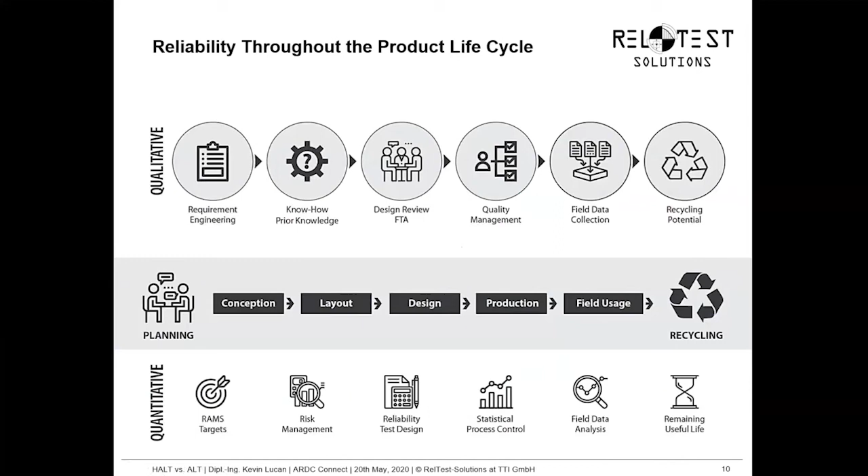Let's have a look at the motivation for this webinar. When we are talking with customers, most of our customers know different kinds of reliability tests, like you can see them here on the left side. Degradation tests, burn-in tests, but also the highly accelerated life test as well as the accelerated life test. And when we are doing reliability tests, it's quite important what kind of purpose the test should have. Do we want to improve the reliability? Do we want to measure the reliability? Or is it a totally different purpose of the test? And with this webinar, I will try to answer, especially for HALT and ALT, what these tests can be used for.

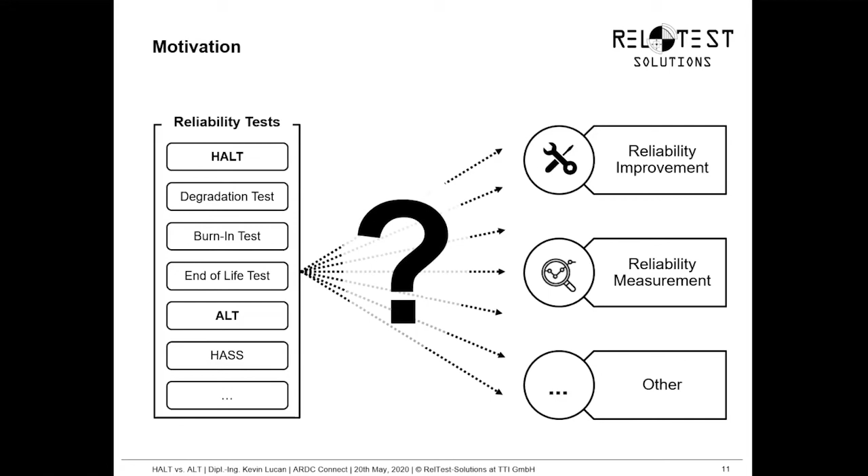But let's start with an overview about reliability tests in general. When it comes to product testing and product development, we are doing a lot of different tests, as you can see the types on the right side of the top. We are doing functional testing, environmental testing, verification testing, and in the end, hopefully we are also doing something like reliability testing.

And reliability testing is some kind of special, because reliability testing contains aspects of the verification, because in reliability you want to measure probability. It also contains part of the functional and the environmental aspects. So it is quite important that we consider these aspects too, and we have a look at them over time.

General purposes of reliability testing are, of course, we want to measure and demonstrate the reliability of our products. Therefore, in most cases, we have to determine a Weibull distribution and effects on the reliability. A second important purpose, especially in the early product development phase, is the improvement of the reliability. Here it's important that we gain knowledge about our product to learn what are the critical failure modes, what are their root causes, and are they relevant for the future.

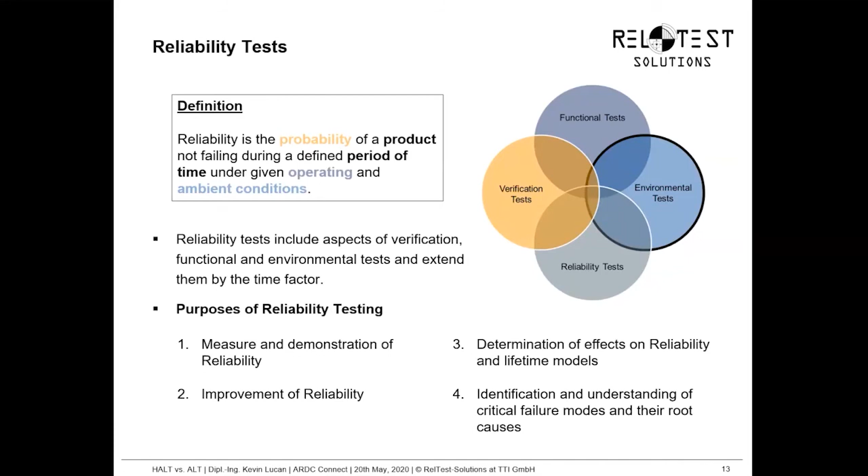But let's have a look at quantitative reliability. Their purpose is quite clear. We want to measure the reliability, and the failure root cause here is the robustness and the design. It's not necessarily a lack of robustness, but we want to measure the lifetime, the robustness and the design. We want to do this based on representative field loads because we want a good prediction for our reliability in the field later on.

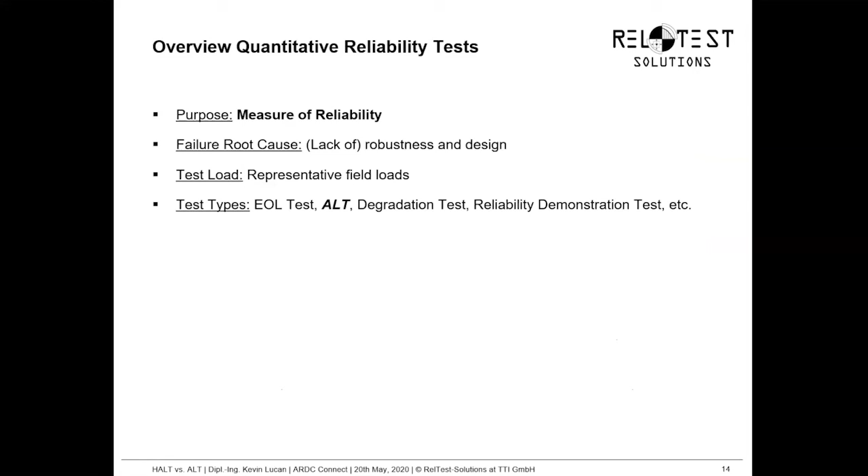Typical test types here are the end-of-life test, the accelerated life test, the reliability demonstration test, and the degradation test, which I show you quickly here. In a degradation test, we measure our degradation characteristic over time, then we estimate our degradation model. We make a prognosis of when the end-of-life criterion is reached, and then we can make a classical Weibull analysis to measure the reliability of our product and, for example, to demonstrate the reliability requirement. So demonstrating a reliability requirement is a classical purpose of a quantitative reliability test.

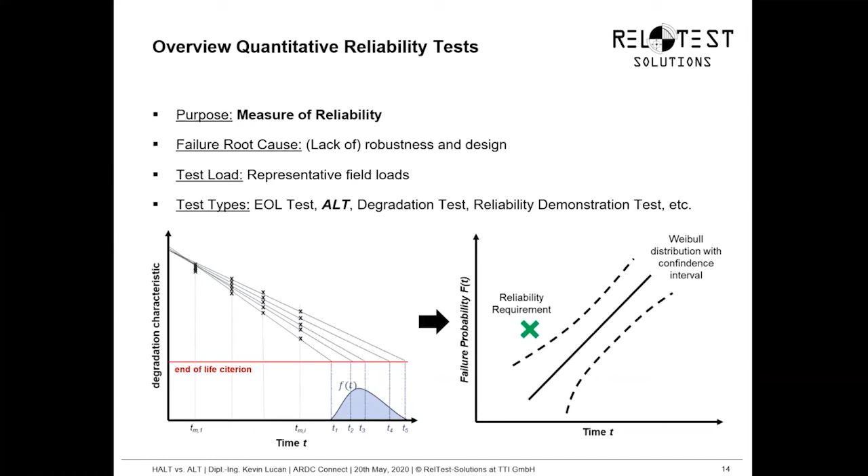On the other hand, qualitative reliability tests clearly have the purpose to improve the reliability. Therefore, their root cause is more design weakness and production error. Here, any kind of load which is suitable to identify this design weakness or production error is reasonable to test. Typical test types here start with the highly accelerated life test, the highly accelerated stress screening, the highly accelerated stress audit, environmental stress screening, and so on. But the purpose here is to improve the reliability.

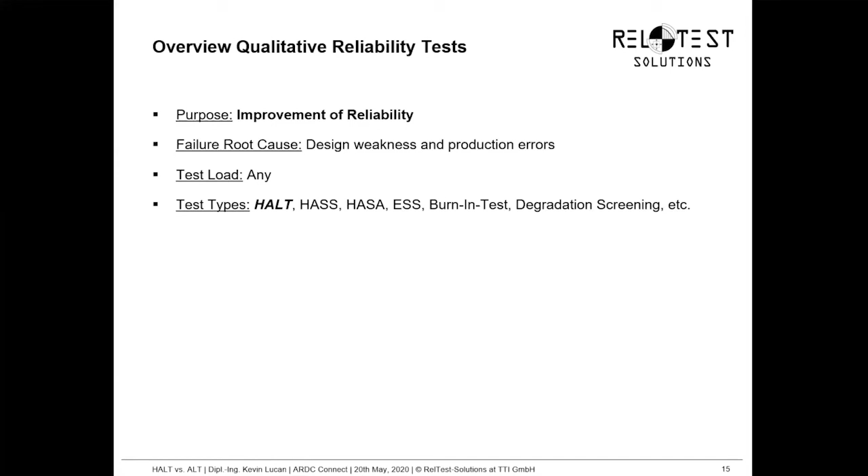Let's look at this in an example of the bathtub curve. Let's assume we have this kind of product. We haven't measured it, but if we had measured our failure rate, this would be the result. When we are now doing highly accelerated life tests, we are identifying our design weakness. If we are doing HASS, ESS, or burn-in tests, we are reducing production errors. So this helps us shift the bathtub curve down, to reduce especially the early failures and improve the reliability. Therefore, the main focus of qualitative tests is the early failures. We want to improve the reliability and fix these kinds of failures.

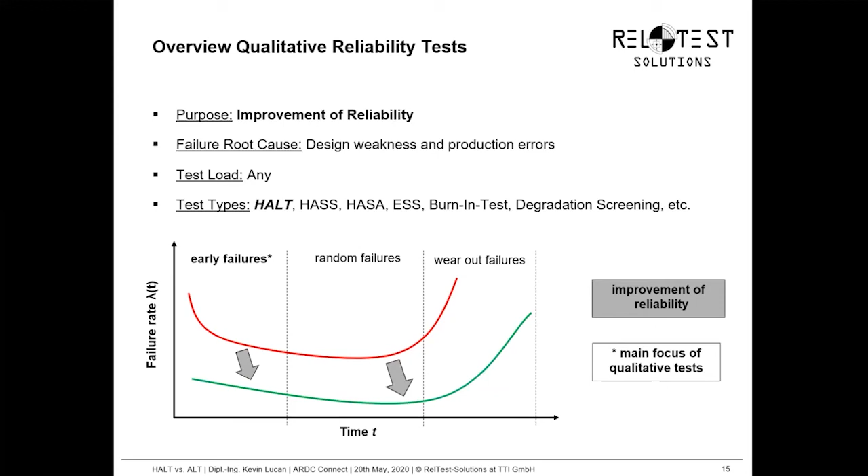This brings me to the first topic, the highly accelerated life test. We first get the deep dive in. The purpose of the highly accelerated life test, as mentioned before, is quite clear. We want to improve the reliability, and in detail, we want to identify our failure modes and design weaknesses. There's a very big benefit of highly accelerated life tests because they only need a short test duration and a small sample size.

But on the other hand, we have to go so high with our stress that we reach the destruction limit. And this can be critical, because going that high with our stress level, we have to think about whether the failure we see in a highly accelerated life test is relevant for field load conditions or not. So a failure analysis is necessary.

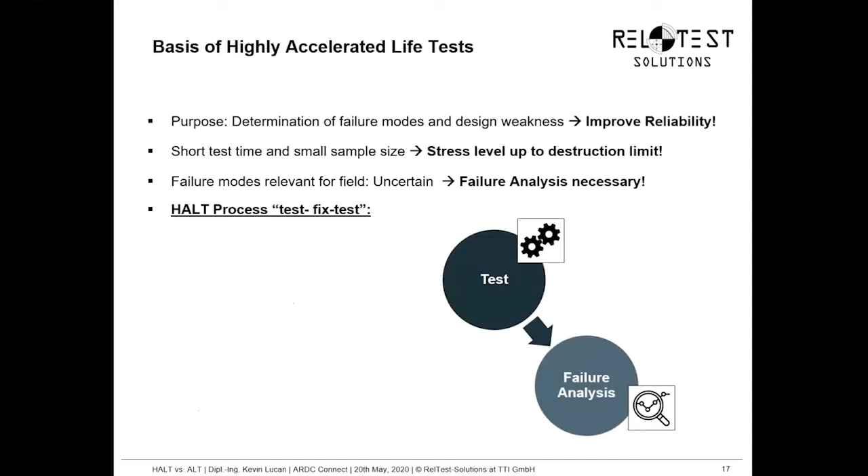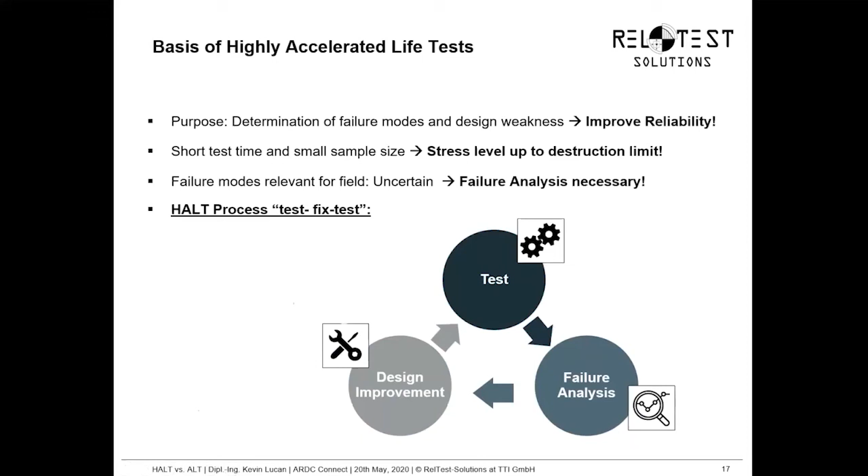Therefore, the highly accelerated life test can be described more as a process called test-analyze-fix. Starting with the test itself, we see some failures, and we have to analyze if the failures are relevant for the field load condition. After that, we can improve the design if it's relevant, and then we have to validate our design improvement. We repeat this process until we no longer see any relevant field failures in our product.

What is necessary to plan such a highly accelerated life test? Most beneficial and necessary is product knowledge. For planning such a test, you need the product designers on board. They can help you in the area of stress definition. So what kind of stress types do we use? What kind of stress severity do we use?

After that, we will have our process with the test execution, the failure analysis, then we are making a decision: is the improvement necessary or not? And if yes, then we improve the design and loop back to the test execution.

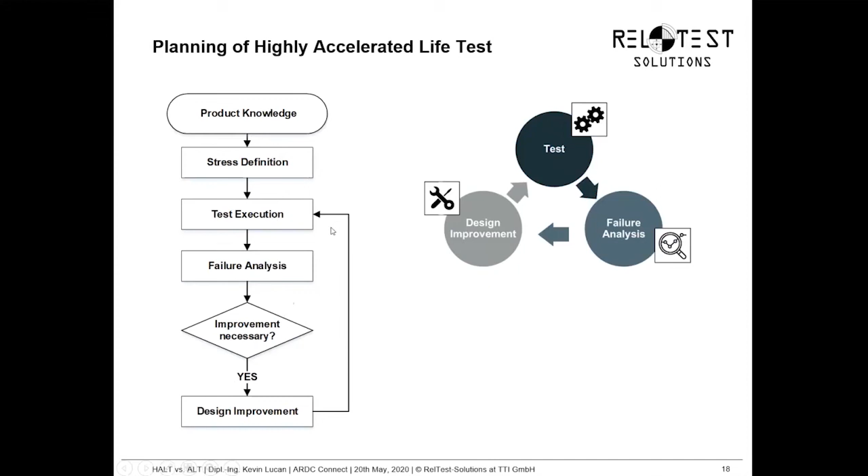Key factors for planning such a highly accelerated life test are, of course, the stress type definition, the stress severity definition, and failure analysis and design improvement, because we don't want to fix the wrong failure modes, because this will lead to oversizing in our work.

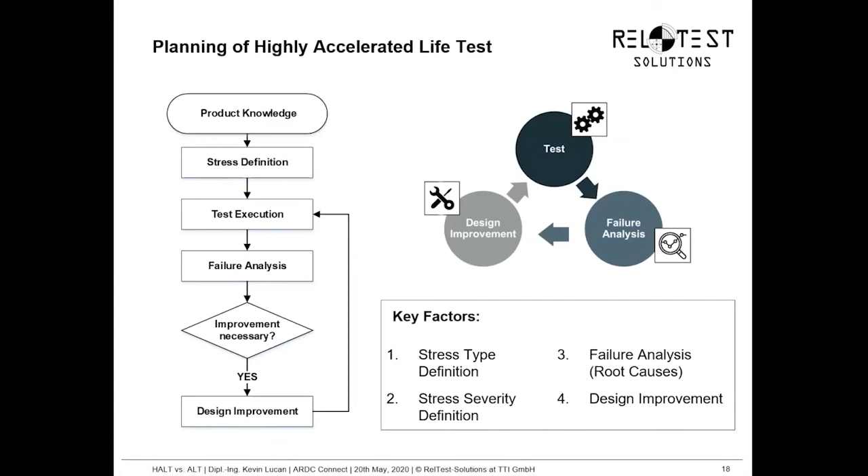Let's have a look at the stress type definition. Typically, stresses applied in highly accelerated life tests are mentioned in the IEC 62506. It's typically temperature, vibration, shock, and so on. But of course, as I mentioned before, a highly accelerated life test is not limited to these stresses. Here it's only important that the stresses we are applying in our tests are triggering the relevant failure modes, or the early failure modes, or in general the failure modes.

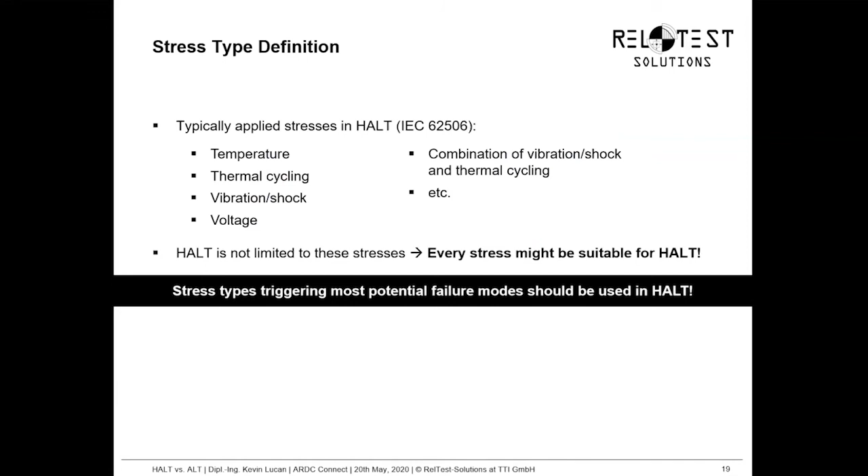Here the best strategy is to make an FTA or an FMEA to identify the stress types which are triggering most of the potential failure modes. And this would be the best base to start a highly accelerated test.

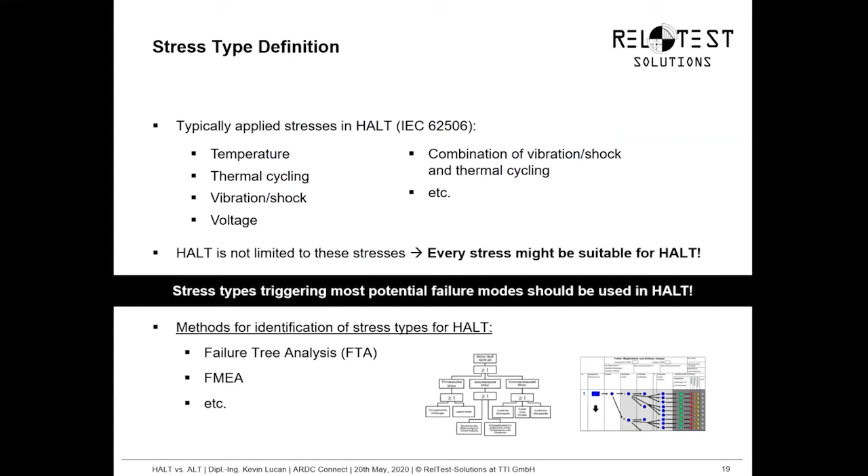Let's talk about the stress severity definition. I've told you before, the stress goes up to the destruction limit in a highly accelerated life test, and we're doing this by stepwise increase. But here it is quite important that we also define a maximum stress level. And I will show you in the example of the Wöhler curve why this is so important.

Let's assume your product designer used a material for which this Wöhler curve is representative, and you now have to plan a highly accelerated life test, and you start with a very high stress level, for example here in the area of low cycle fatigue, and of course you will see quite soon a failure within this area. You can say, oh, quite good, the test was finished quite fast.

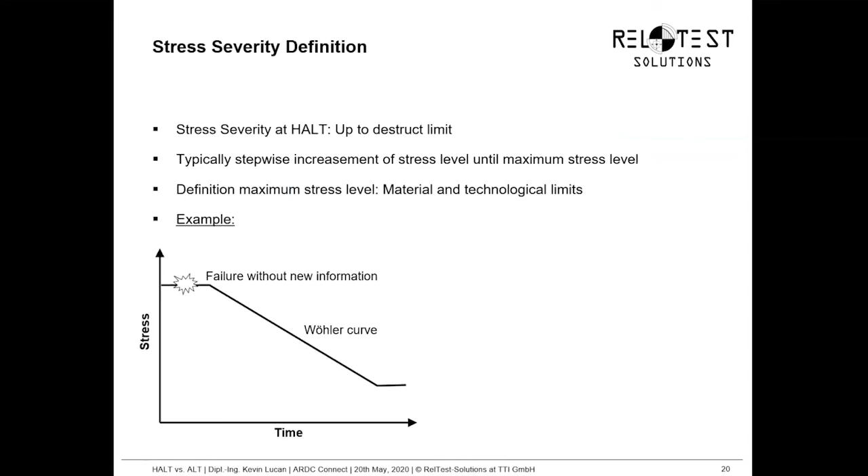But on the other hand, imagine, what have you learned from this test? You haven't learned a lot, because you just validated the Wöhler curve the product designers used to design the product. And therefore, it's beneficial to set the maximum stress level under this stress level and then plan our step stress up to this maximum stress level, because only then will we gain new information about our product.

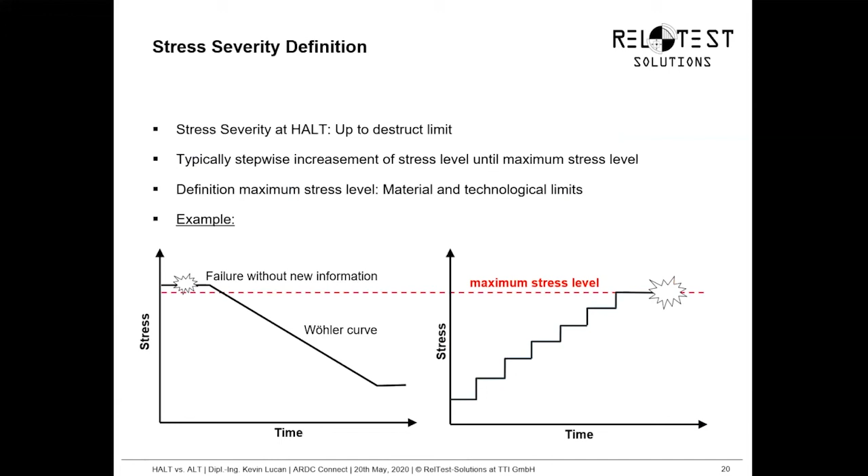Also very important for the highly accelerated life test is the failure analysis and the design improvement, because fixing failure modes may also lead to oversizing in our product. So we have to make sure that the failure modes we are going to fix are also relevant for our field load condition. And therefore we have to make an evaluation of the failure mode, starting with the root cause analysis.

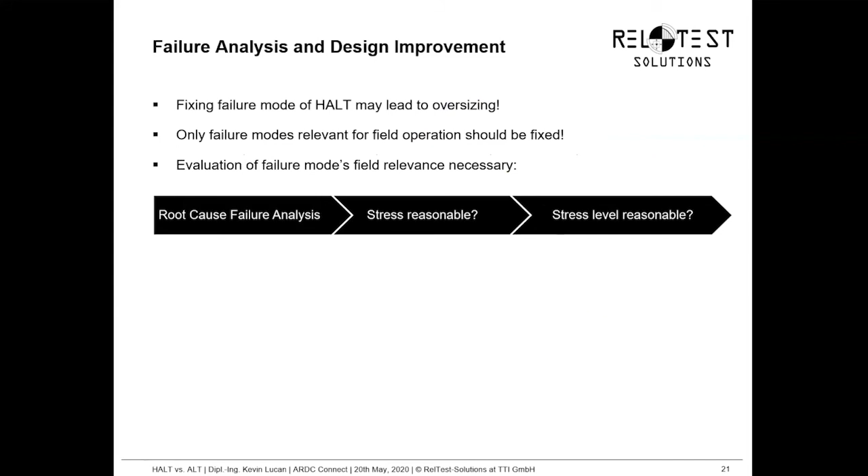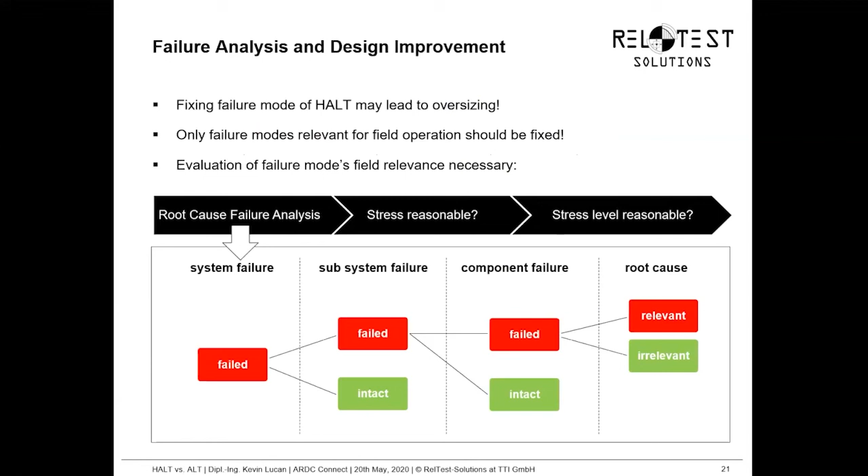In the root cause failure analysis, we have to identify where the failure is happening: in our system, our subsystem, on the component level, what is the root cause for the failure, and which stresses may cause this failure mechanism. After that, we can compare the stresses causing the root cause with the stresses our products see in the field, for example mechanical influences, mechanically active substances, contamination, and so on. Is the stress type relevant for the field condition?

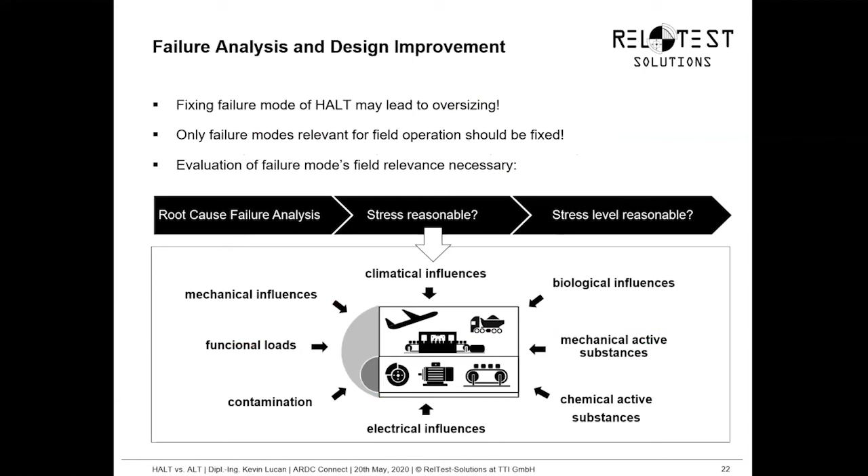Then we should think in the next step: is the stress level reasonable? And here we have to consider the operating margin of our product. Within this margin, between the lower operating limit and the upper operating limit, our product is operating. And if we see failures within these margins, then it's reasonable to fix them.

When we now go more to the right or more to the left, we will reach our upper and lower destruction limit, which is in this example quite reasonable. Here I would say this is quite okay, because we have a good distance between our operating margin and the destruction limit.

But imagine if we have failures at the upper destruction limit and we are going to fix these failures, improving our design and shifting the distribution of the upper destruction limit more to the right, then we are well on the way to over-designing the product. And this has to be prevented.

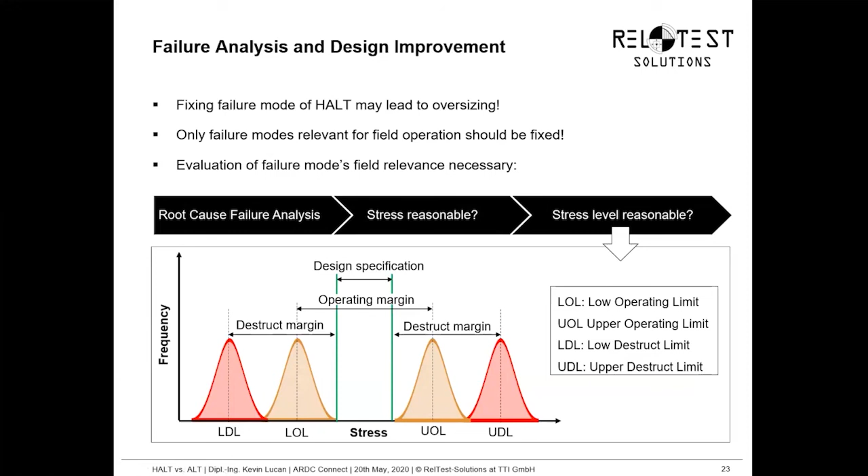This brings me to an example about the highly accelerated life test of a DC-DC converter for airplanes, which is listed in the IEC 62506. Here, three kinds of highly accelerated life tests were performed, starting with a low temperature test, where they recognized that the startup is quite unstable.

They identified possible root causes, but in the end, they came to the decision that it is not necessary to make a design improvement, because we are here already at the limit of our technology, and we rather have to ensure that the DC-DC converter is operated within the limit of technology.

In the next highly accelerated life test at high temperature, the 12-volt voltage disappeared. The reason for this was that there was an internal temperature limit which causes the shutdown. And this is a typical kind of failure when you're getting a potentially failed part back from the field, which is running in your test.

So here we have a typical kind of a random failure, because if the limit is too low, then the software will shut down the DC-DC converter. The customer will think, okay, it's failed, and therefore the company here took the action to adjust the limit which was defined in the software.

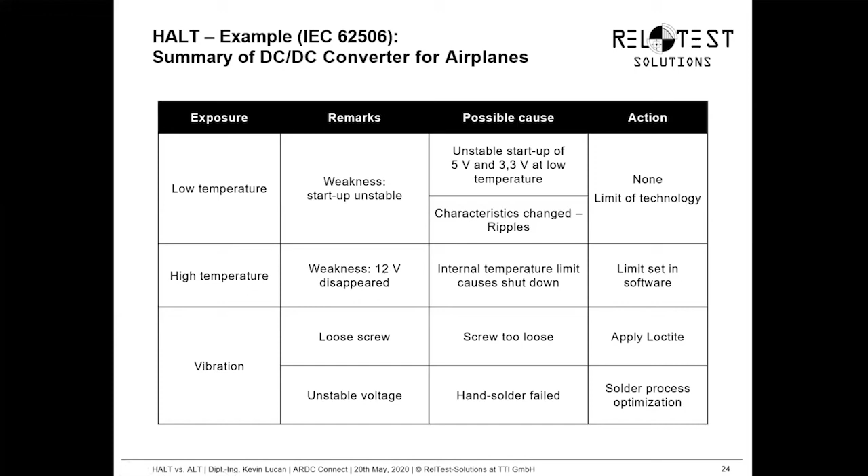This brings us now to the topic of accelerated life tests. And because highly accelerated life tests are used to improve the reliability, it's quite clear we now have a test which is here to measure the reliability.

In detail, with an accelerated life test, we can determine and describe the relationship between the stress and the lifetime of our product. And with this knowledge, we can then make a prognosis for the reliability of our product under field load conditions, which is quite beneficial because an accelerated life test is finished much, much faster than an end-of-life test on representative field stress conditions.

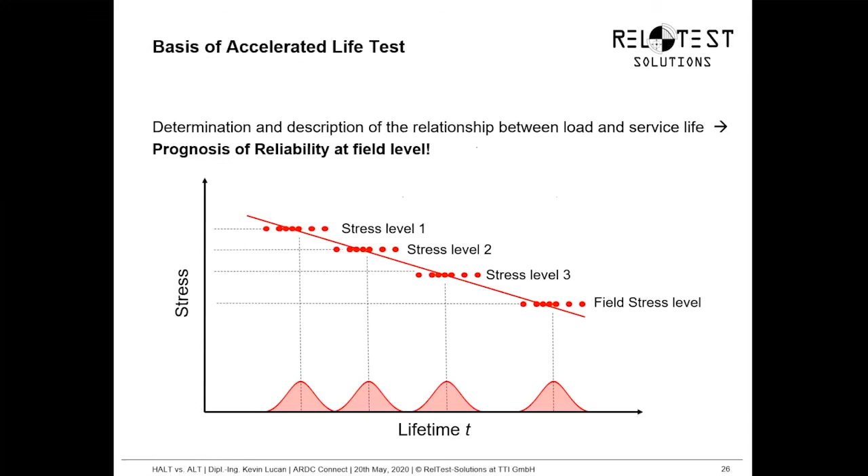The typical process of planning an ALT starts, of course, with the reliability requirement we have to demonstrate. And with this requirement, we go into our planning. We have to define our test levels. We have to define the sample size per test level. And after that, we have to execute the test.

And then a very important step is necessary. We have to make sure that on all test levels we see the same failure mechanism, especially as it will occur in the field. This is very important because we want to make a prognosis for the field condition. Therefore, we have to make sure we see the same failure mechanism. If we have the same failure mechanism, we can then make a prognosis for the field reliability.

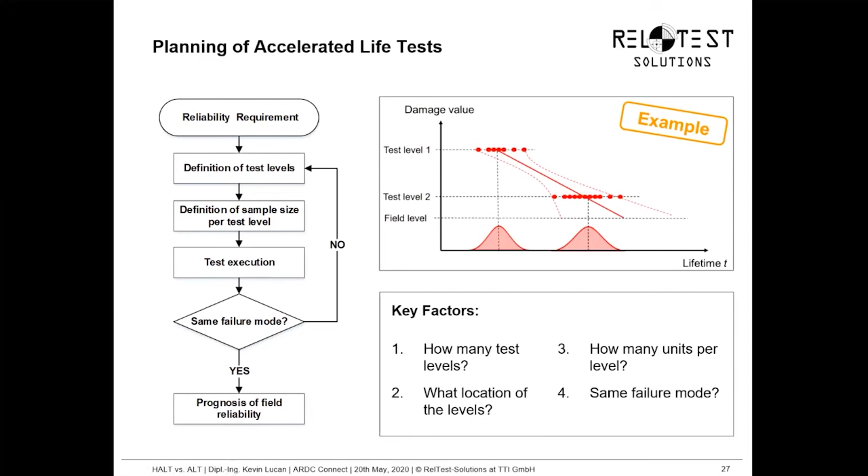Key factors here for planning are the number of test levels which are necessary, the location of the test levels, so the stress severity, how many units per test level, and as I mentioned before, we have to make sure that we see the same failure mechanism on all test levels. Let's start with the key factor, how many test levels are necessary.

And of course, the answer here depends on the lifetime model which suits best for your product to describe the relationship between stress and lifetime. If we have a linear relationship, then test levels x1 and x2 would be sufficient for an accelerated life test. If we are not sure if we have nonlinearity within the lifetime model, then we should add a third test level to check this.

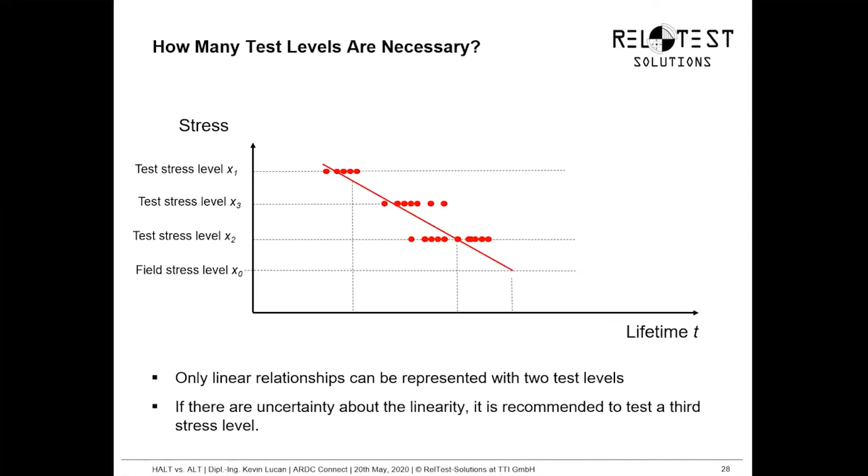So in the end, if you are not sure if you have a nonlinearity in the lifetime model of your product, then make it safe and test the third level too.

Let's come to the specification of the stress level, starting with the highest stress level, which we call here stress level 1. For the stress level 1, it's quite obvious that we have the biggest benefit of an accelerated life test if the test duration is as short as possible, and therefore we want to define the stress level as high as possible. But we should not go above the technical maximum of the acceleration limit.

And in this case, this means the limit where we no longer see the failure mode which is relevant for the field. So if we have a changing failure mechanism by going up with the stress too high, then we should go back down a little bit so that we see the same failure mechanism as in the field. Here, of course, the results of a highly accelerated life test we may have performed in advance of this test may help us in planning the highest test stress level.

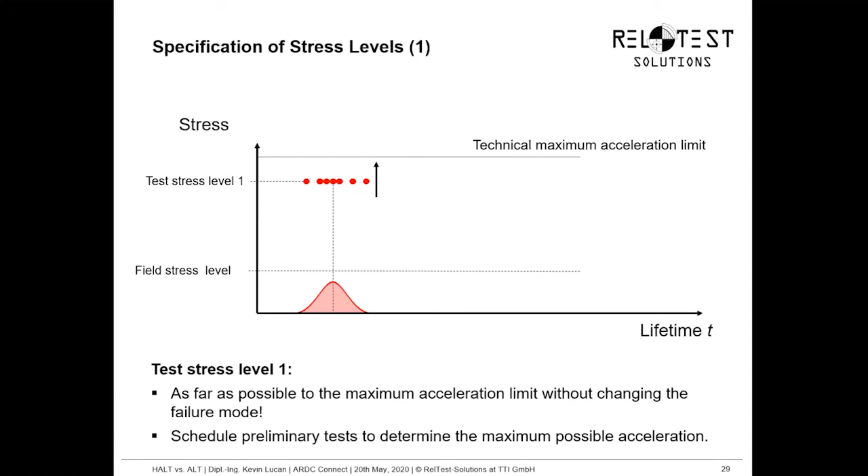Let's have a look at the lowest test stress level, the stress level which is quite near to the field stress. Here, of course, it's quite beneficial on one hand to have this quite near to our field stress level, because then we have a high prediction quality, but on the other hand, we also have a very high test duration. So two goals which we have to deal with in our compromise.

On the other hand, if we define the stress level too high, we will have a very huge scattering in our field level prognosis. And in the end, here you have to find a compromise between the precision of your reliability prognosis for the field and your test duration. And typically, the boundary conditions in your test levels are always giving you the opportunities you have for planning the accelerated life test level 2.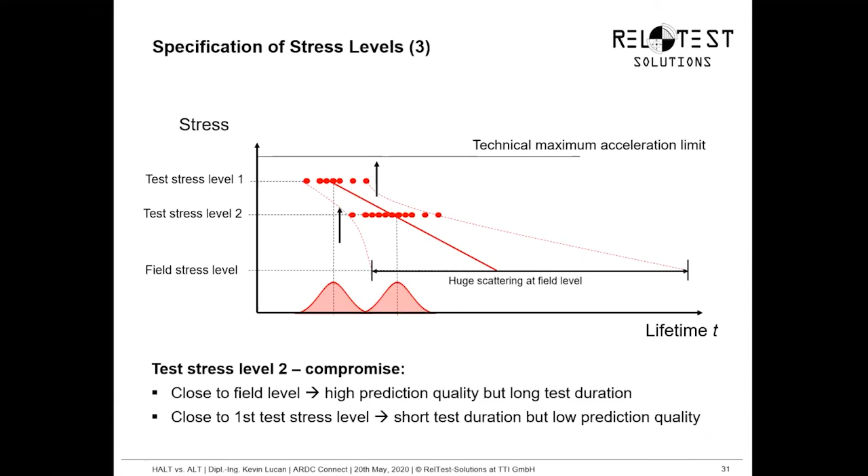The third key factor for planning an accelerated life test was the sample size per test stress level. And here it's always the case that at the highest level you have to test fewer units than on the lower level. The reason here is if we test more on the lower level, of course, we are raising our prediction quality for the field level condition.

There's also a formula where you can calculate the proportion of the parts which have to be tested at test level 2 based on the extrapolation factor, for which the input of the test stress level 1, 2, and the field stress level is necessary. And based on this relationship, the proportion of the parts which have to be tested in test level 2 can be calculated. It's a formula from the master of accelerated life testing, Nelson.

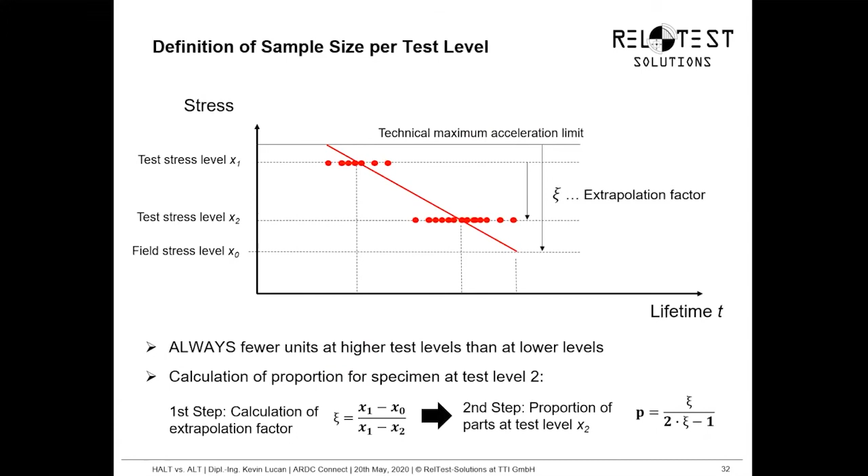This brings me to the example of the accelerated life test. Here, as announced in the beginning, the example for the commercial vehicle brakes and for the air brake. If you are interested in this example, you can download the technical recommendation of the working group from our homepage. But now let's have a look together at the example.

For this example, it is assumed that 1 million load cycles with the load level of 6 bar correspond to a service life of 2 million kilometers. So 2 million kilometers is a typical lifetime objective for the commercial vehicle industry when it comes to long distance missions. Boundary conditions for the accelerated life test are: we have already defined the test level 1 with 16 bar. The reason here is this was the maximum of the air pressure cylinder.

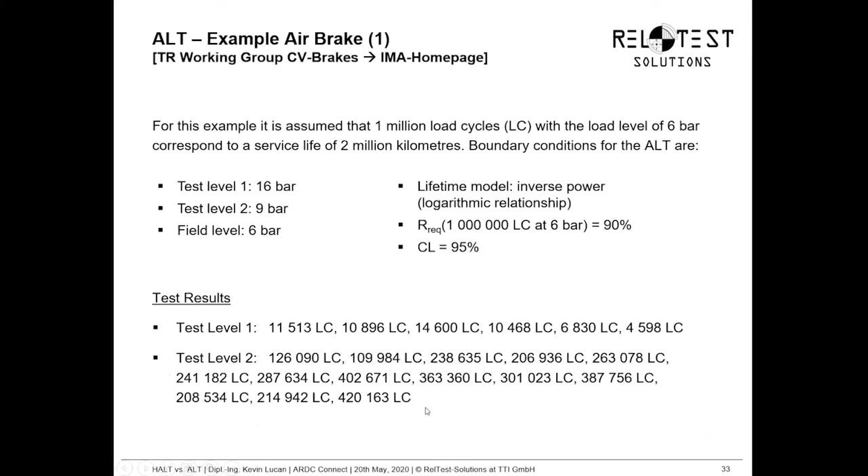Then test level 2 was defined at 9 bar, and the field level, as I've said before, 6 bar. We have to prove a reliability requirement of 90% at 6 bar with a confidence level of 95%. Here you can see the listed test results. And the first step now is we have to check if we see the same failure mechanism on both tests.

And what we can use for this check, of course, is to compare the Weibull shape parameters. And in this case, they are quite similar. It's not always the case that these are so similar, because in a lot of cases, we see lower scattering at the higher load condition, and then we will see a higher shape parameter, for example, at 16 bar or whatever the highest load condition is.

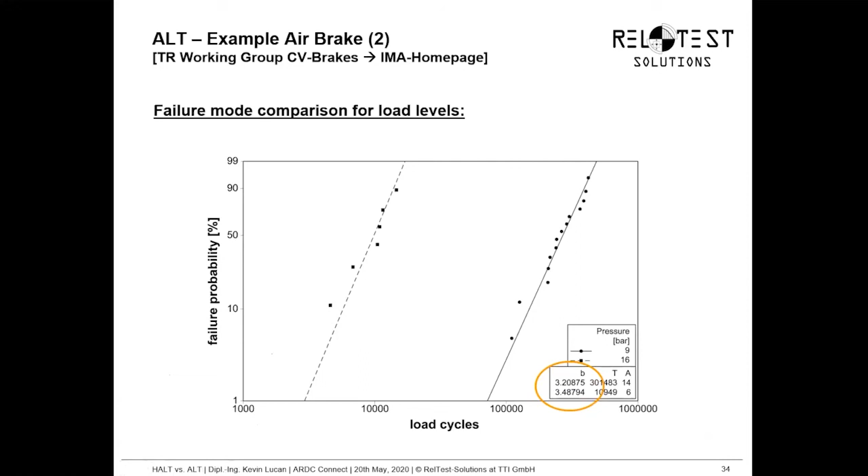But in this case, we are quite satisfied. We see the same failure mechanism. In this case, it was fatigue failure of the caliper of the brake. Then we are making our prognosis for the field reliability. We estimate a model for the 10% percentile because we have the reliability requirement of 90%. We estimate our confidence intervals.

Then we have to look at our field level condition, and luckily we see here that the requirement lies on the left side of our 95% confidence limit. So luckily we succeeded in demonstrating the requirement in this example.

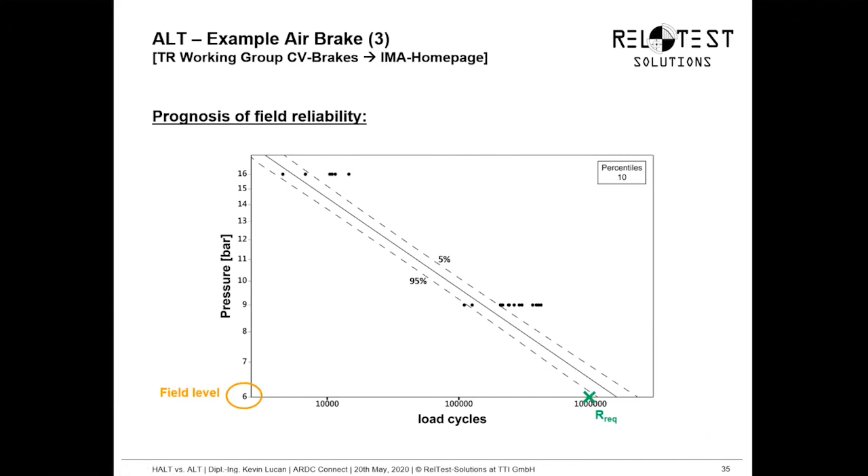This was a deeper look into highly accelerated life test and accelerated life test. Let's compare these tests more directly. The table you can see here on this slide is of Mr. Yang. You can find this table in his book Life Cycle Reliability Engineering, which is a very good summary for the comparison of highly accelerated life test and accelerated life test. And therefore I will only discuss 3 issues of this table with you.

First issue, it's quite clear we have different purposes between highly accelerated life test and accelerated life test. Highly accelerated life test improves reliability, and in an accelerated life test we measure the reliability.

Let's have a look at the severity of the stress. In highly accelerated life test, as we discussed before, we go up to the destruction limit. And on the other hand, in accelerated life test, we have to make sure that we do not change the failure mechanism if we go too high in our test condition. So Mr. Yang prefers here to stay below the operation limit, but of course you can also go higher than the operation limit, but then you have to make sure that you still see the same failure mechanism as in field load condition. This might be very beneficial, especially for products which have to last 30 years or something like this.

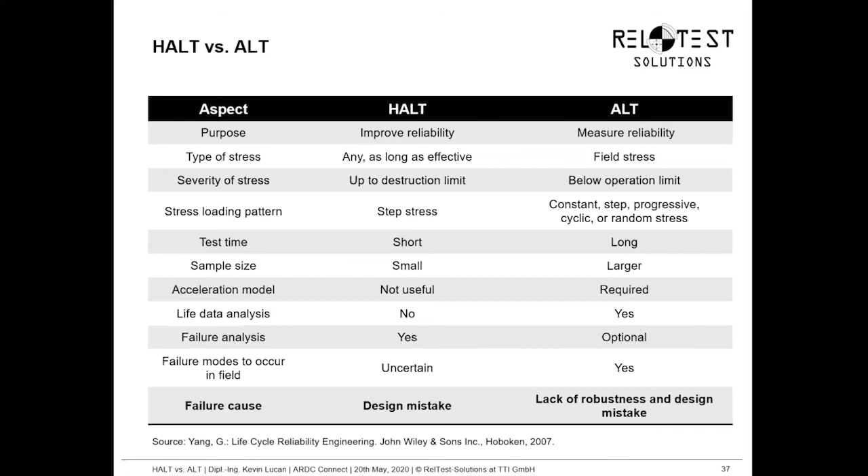Last aspect I want to discuss with you is the failure cause. Highly accelerated life tests address the design mistakes, the early failures. And accelerated life tests, on the other hand, are addressing lack of robustness and design. But what does this mean? When do we have to apply them in terms of our product development process?

And as you can see here, a rough reliability management process starting parallel to the planning phase and the product development, ending at the recycling phase of the product. The reliability management starts typically with the reliability planning, the weakness analysis and the reliability improvement, the reliability testing and the demonstration, the reliability assurance in production, and in the end, we also want to learn something about the reliability in the field, about the load conditions of our product in the field.

And of course, HALT are used to improve the reliability. Therefore, they are typically applied here in the weakness analysis and reliability improvement phase. After we have improved the reliability quite well and no longer see any kind of early failures, we can then perform an accelerated life test to measure and demonstrate the reliability for the condition. So it's quite beneficial to do both of these tests.

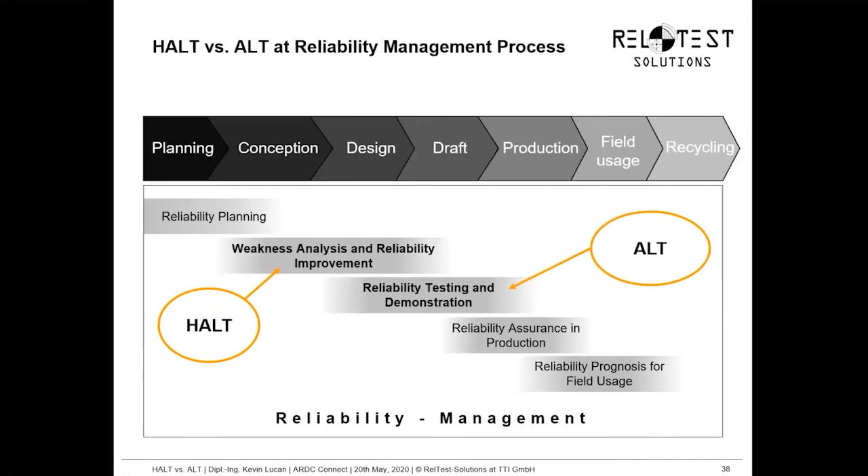Let's wrap this webinar up, starting with the highly accelerated life test. They are very effective when it comes to improvement of the reliability. They have a short test duration and small sample size. But on the other hand, we still have to make a failure analysis to identify whether the failure type is relevant for improvement or not. And another disadvantage is we can't measure the reliability with a highly accelerated life test.

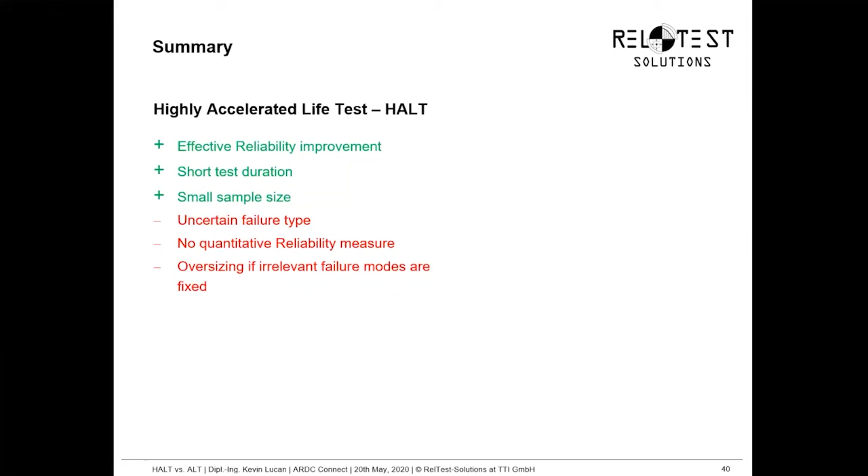Accelerated life tests, on the other hand, are used to measure the reliability. We are also estimating a lifetime model to describe the relationship between the stress and the lifetime of our product, which can be especially beneficial when we have to make reliability prognoses for different markets where different load conditions are relevant. And an accelerated life test, at least compared to the end of life test, has quite a short test duration. But of course, if we compare it with the highly accelerated life test, then it's quite longer.

Another disadvantage is we only want to see wear-out failures in an accelerated life test. So in most cases, when we're doing an accelerated life test and still have to deal with early failures, it's quite probable that we have to redo our accelerated life test after we have fixed these early failures. Of course, estimating a lifetime model is connected with a little bit of effort, so we have quite a big sample size for accelerated life tests.

But let's come back to the beginning of the seminar. What test strategy is more beneficial? The answer is quite clear. Both are beneficial. We first have to do the highly accelerated life test in our reliability process to improve the reliability, to prevent early failures. And after that, we can use the accelerated life test to measure and to demonstrate the reliability of our product. And this is the most beneficial way to ensure that we reach the product quality and reliability we want to have.